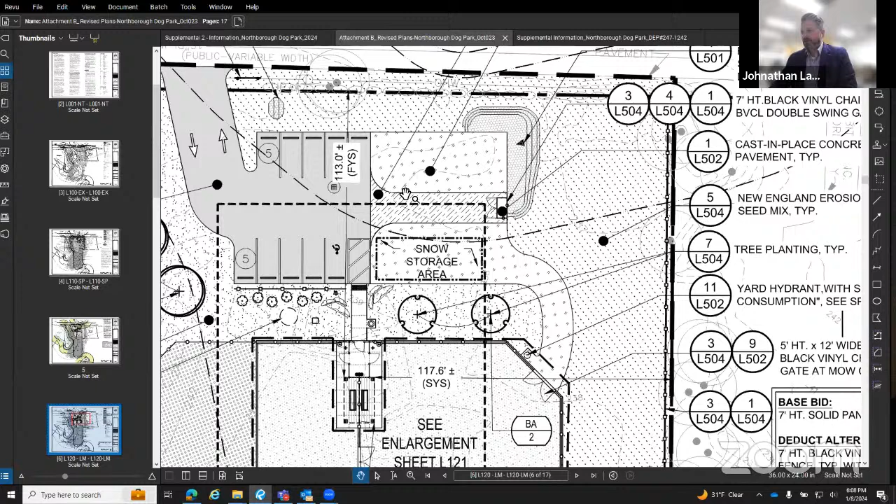Another change made since you last saw this design was the overflow parking area. If you recall, it was originally going to be all asphalt millings. Now there's just this central section that's asphalt millings to access this small dumpster area, and the rest will be 3/4-inch crushed stone paving. The snow storage area is now located here.

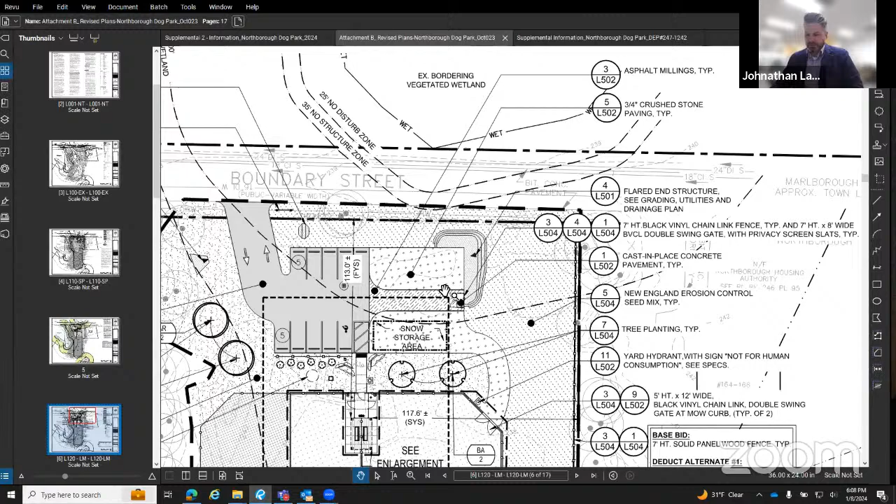We submitted the documents, and on January 2nd got 12 comments from Vinnie, which we've corresponded back and forth with him and addressed all those comments. Those are the major changes since you last saw this. I believe some of the grading was revised slightly to accommodate these new surfaces in the overflow parking area, but they all meet current code requirements.

With that, I'll open it to any questions. Okay, good, thanks Johnathan. Vinnie, in terms of the responses you have, where do you stand on that?

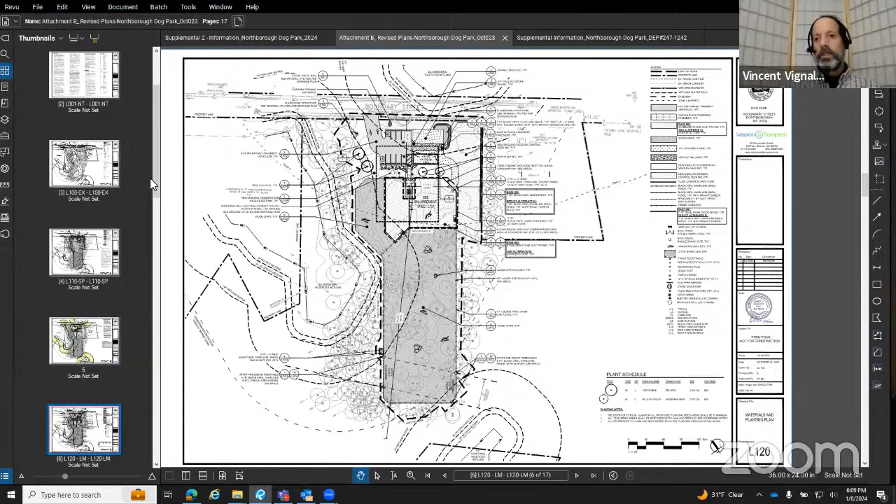Yes, I've gotten the responses, I got a response to the comments, actually I got it this morning. They were good, they responded to the issues and concerns I had raised regarding their drainage, that the system is going to work effectively, and the conditions of doing a test pit in the basin portion of the infiltration basin were responded to. That's going to be a condition of the approval.

I have a list of, I think, 7 conditions now that I included in those responses. The first was the soil deep test for the soil. Then the fill material in the compost filter tube had to be composted material. It's kind of common sense, but the detail originally just said it could have been wood chips, so if it's going to be a compost tube, it should be composted.

They don't show, and I don't know if Johnathan can show where the collector drain discharges, but we were thinking of adding a condition that it has to discharge to the infiltration basin on the east side, so it's not going directly into the wetlands on the west side. Okay, so is it actually shown on the plan, Johnathan?

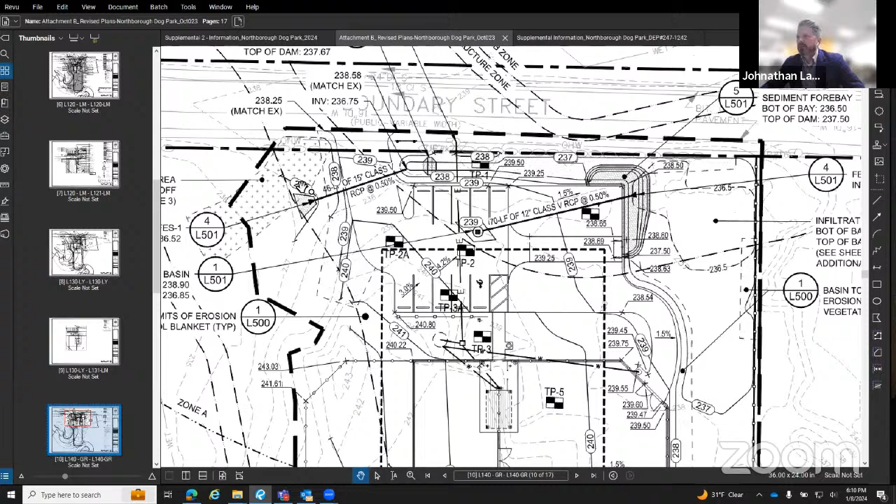Grading plan. Yeah, it was the alternate for the collector drain. I'll have to check that back with our civil engineer to see if he incorporated that. Okay. But that's a condition we can add in.

And then the long-term pollution prevention plan, they just submitted it this morning, and I need to review it to make sure it's approvable, but I just have a condition that it will get approved, or needs approval, before they get permission to start construction.

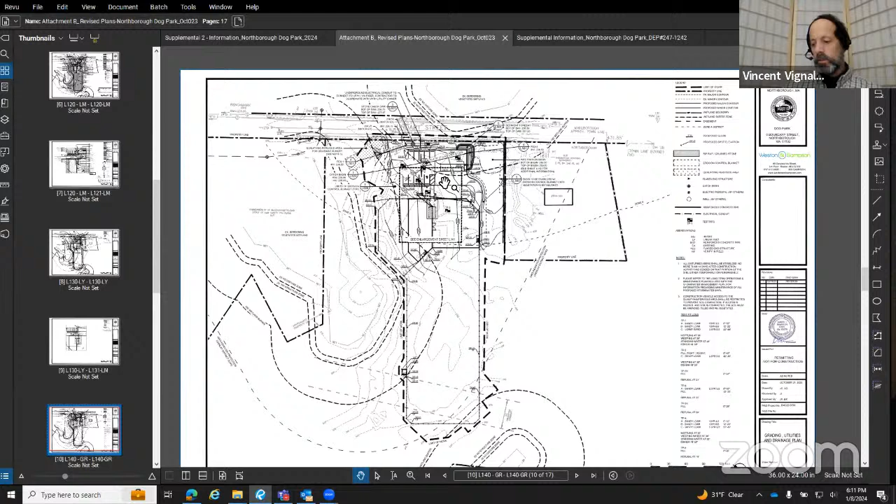Okay, yeah, and then there was a comment from DEP about a discharge within zone A for the reservoir across the street. And Weston and Sampson said they will revise or address that and resolve it with DEP. I was going to put that as a condition of approval that needs to be done prior to beginning construction. Okay, and then actually the last one just came up.

The response that they submitted was submitted by a wetland scientist. She seems like she's doing a good job, but there were comments and responses in regard to flood elevations, drainage calculations, different treatment processes that you need. I was looking to protect the town to have a PE stamp or some other certified person certifying that document. Johnathan sent me an email saying he would have the PE take care of that. So I think all those calculations and drainage calculations were performed by a registered PE, so we can have them sign that letter.

So those were the conditions or issues around the comments that I had outstanding. Vinny, are any of these conditions of concern for you, or could we move forward and just have them signed off before construction begins? You'd have to sign off on those conditions, but we can start moving. It's up to the commission if they have other issues or concerns, but based on what I've seen, I think it's in a state where we can close the hearing and issue an order with those conditions.

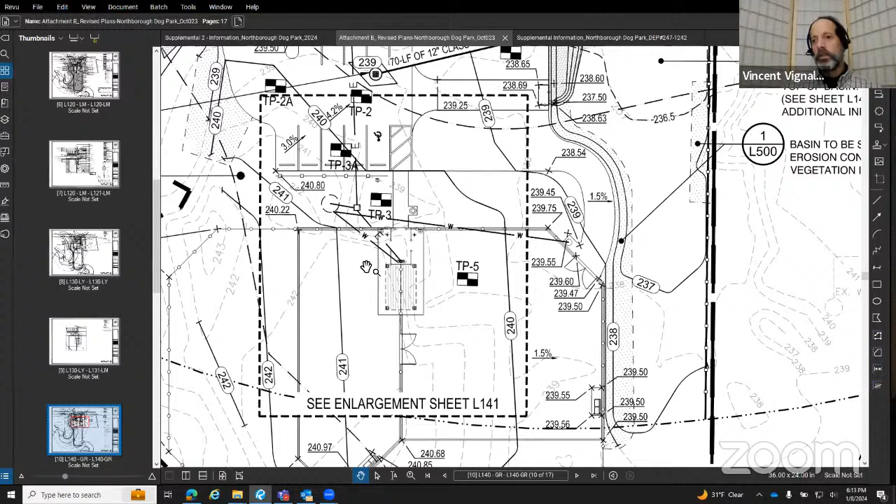There's an alternate proposal for synthetic turf in the play area for the dogs, and within that there's a collector drain that collects that. It's going to have a lot of pee, we assume, because of the dogs, so I didn't want that going straight into the wetland. I thought it should go into the infiltration basin. The grading generally goes toward the east, that's how they designed this, because the wetlands are off to the west. So it's the best layout really for the site, I think. That's correct.

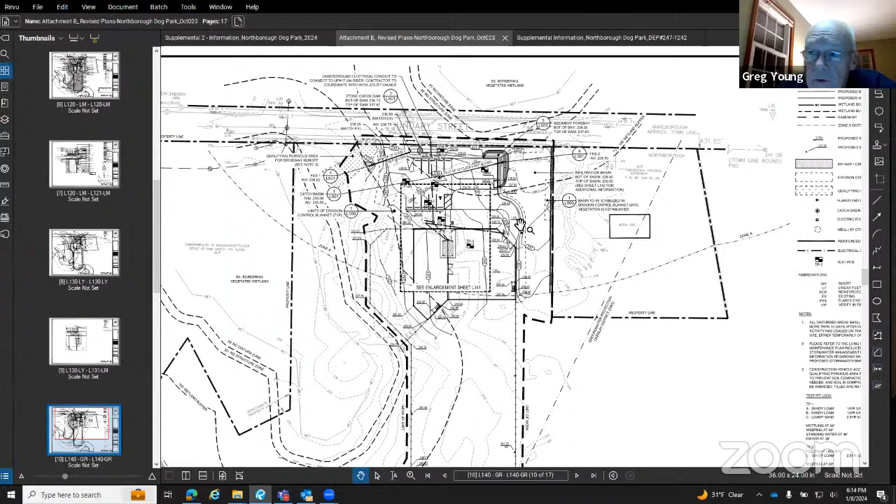Any more questions? No. Let me see if any of the general public or attendees have questions. I don't see any hands up.

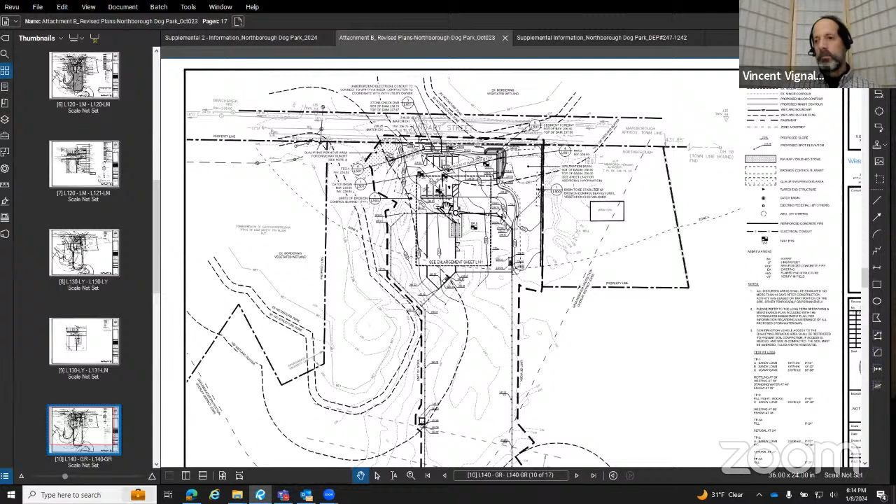So Vinny, it sounds like we can move ahead with closing the hearing and issuing an order with 6 or 7 conditions listed here. Yeah, we have our standard 29 or 30 conditions, and then we would add these 7. Okay, very good. Then we need a motion to close the hearing.

So moved. Second by Diane. Roll call: Dan Clark, yes. Justin Dufresne, yes. Diane Goldner, yes. Todd Helwig, yes. And I vote yes. Now we need an order of conditions.

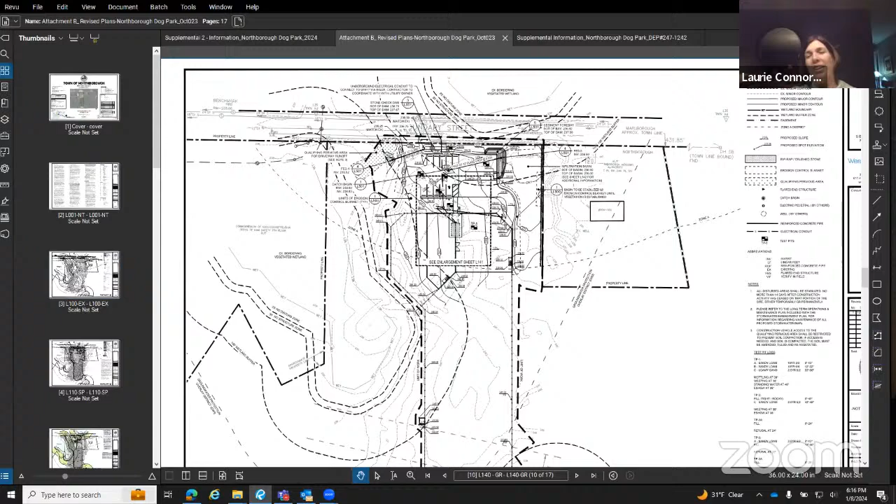Thank you very much for your support. All right, very good. Thanks, Laurie. Looking forward to seeing you at the dog park in a year from now. Okay, fair enough. Thank you, everybody. Thanks, Jonathan. Bye, good night. All right. You're a welcome addition to town.

Let's see, we have continuations here. We have a stormwater management item for 311 Crawford Street. Yes, they submitted a request for a continuation to the next meeting. They're pulling paperwork together and are away on vacation, I think, is the current status.

Away on vacation. Okay, do we think we'll actually see something next month? I think so, because we're getting things ready for the construction season, so I think they need to have something ready so they can get a price for whatever they're going to build.

All right, I guess we give it another month here. We did open this in May, but hopefully we'll get it done before then. At least we'll get something in front of us before May. Oh, I hope so. I'm hoping to see something in the next month.

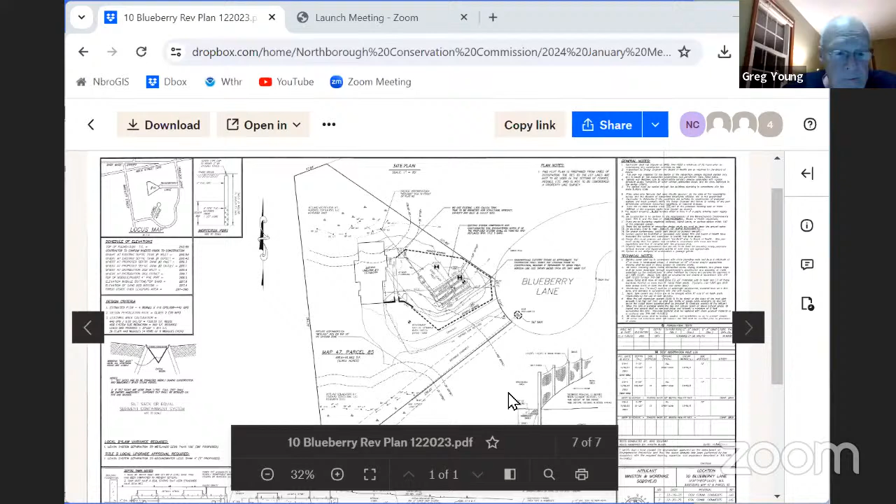Do not see Vito. Okay, let me see if I can pull up the plan. 10 Blueberry. Come on. Sorry about that. No worries. All right, let me see if I can share the screen. I see something, yep, I gotta zoom into it but I'm not sure which zoom I'm looking for here. Here it is, I think so. That's the one. Yeah, oh why isn't it dragging across? I guess I have to use this. Yeah, these computers are new to me.

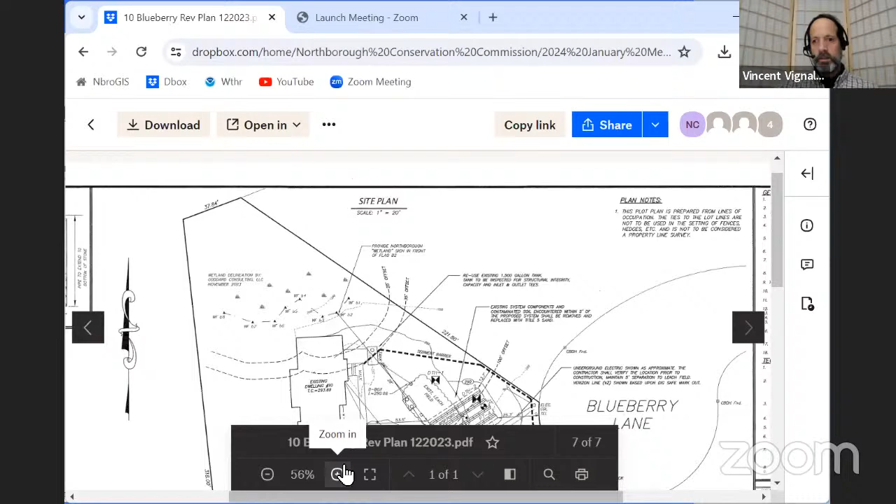Okay, Blueberry Lane, this is a repair, septic system repair. Blueberry Lane here is off of Hemlock, and north is straight up the plan. They have an existing house, and the existing septic system is right in the middle of the front yard, and it failed. They have wetlands to the north and wetlands to the south, and a big pool in the backyard. I think the commission, Greg said, did some investigation or looked at this property for the pool in the past.

So what they're proposing to do is replace the failed system here with a new system, no increase in size. They are 82 feet away from the wetland to the north, and over 100 feet from the south - this is the 100-foot buffer line from the south, so they're about 104 from the south. So they're kind of splitting the distance as best they can and fitting it in this corner of the lot. Driveway comes in here around to the house. So it looks like it's the best they can do for a tight site, and it's a repair, so that should be an improvement.

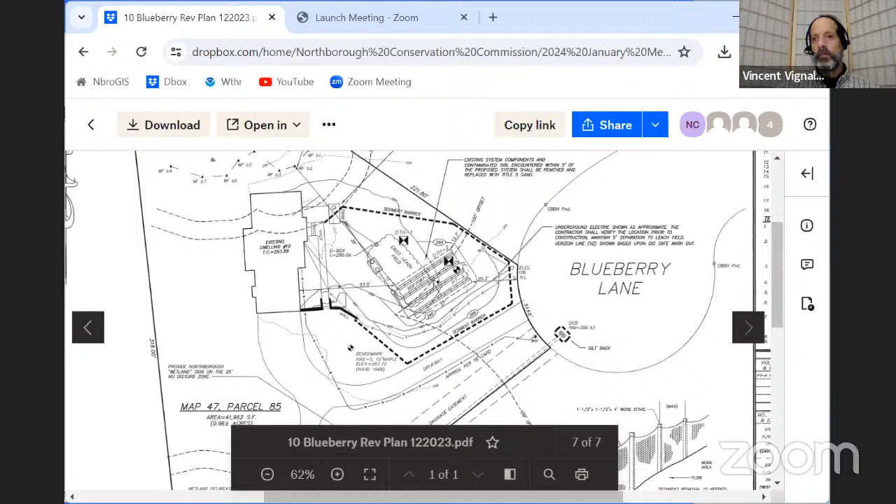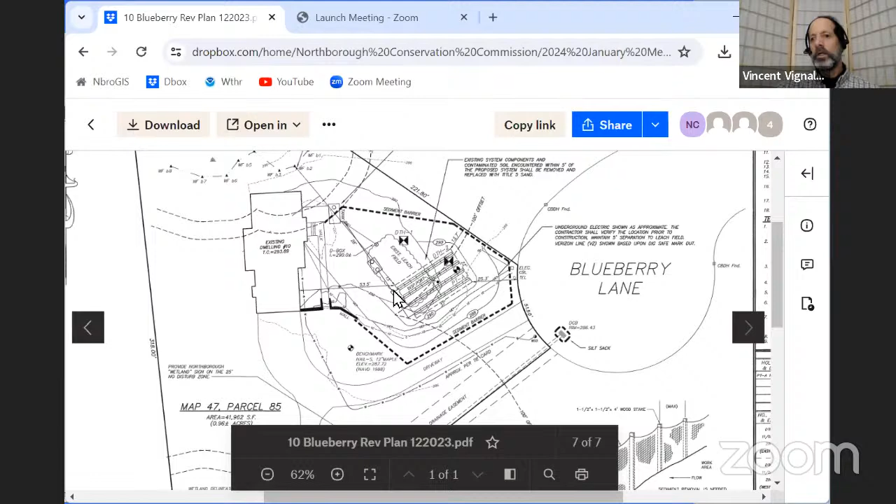It's pretty much the same footprint, right? Yeah, pretty much, same area of system. This is a different kind of system - I think it's one of the modular Eljen modules, so it should work a little more efficiently. And they're going to have to monitor the septic tank. Actually, I think there's a pump in this one. No, so it's Eljen units, and it's just a regular septic tank to a D box.

Okay, the only issue I found with this site was that there's a little access road that comes out here, and there was yard waste, branches and things down in the south, right in the 25-foot no-disturb zone, with some tires and some kind of automobile parts. I have a photo, but it might take longer to find it and get it up for you. What I'm hoping to do is get the order or get your comments, and if appropriate, we'll get an order, and we'll require as a condition that they clean up all the material that's in that 25-foot buffer zone before they can start construction on their septic system.

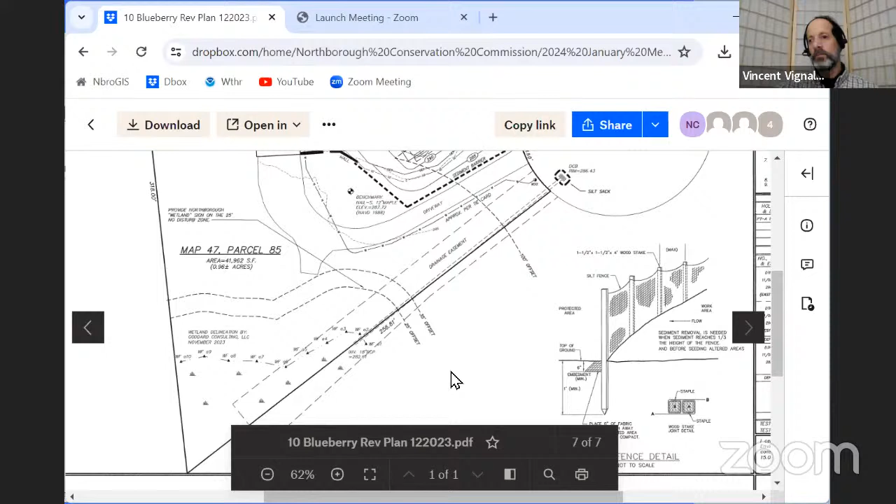All right, it seems reasonable. Any questions from the commission? Comments or concerns? Looks good to me. Yeah, okay, as I say, it looks clear. I will check, I don't see any hands up in the audience.

Okay, then we need to close the hearing on 10 Blueberry Lane. I move that we close this hearing. Second. Second, was that Dan? Nope, Todd. Roll call vote: Dan Clark, yes. Justin Dufresne, yes. Diane Goldner, yes. Todd Helwig, yes. And I vote yes.

All right, now we need an approval to issue order of conditions for 10 Blueberry Lane with the usual conditions, Vinny, plus the one you mentioned about cleaning up the waste area by the southern wetlands, I guess that is. Yes, that'll be before they can start construction of the septic system. Okay, need a motion for that.

I move that we issue an order of conditions as usual, plus the one that indicates they will clean up the mess - mess isn't exactly the best word, the trash, debris, yes - the debris, before they get a chance to get a new septic system. Good, is there a second? Second. Roll call: Dan Clark, yes. Justin Dufresne, yes. Diane Goldner, yes. Todd Helwig, yes. I vote yes.

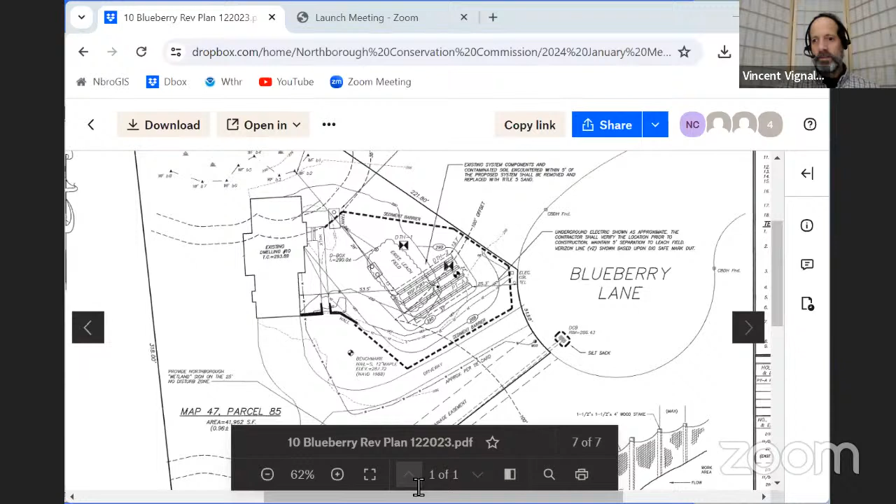We'll hold off till you take that down, Vinny. I know you're working on it, diligently. I'm sorry, whoops. Trying to, how do I get there? Too many screens going. Stop, here it goes, perfect. All right.

The next one we have is 14 Mohawk Drive. That is an RDA for a failed septic system.

I don't see any hands up. I was afraid you were going to say that. That was Vito as well. 14 Mohawk. And I will bring up the plan.

This one, Vinny, doesn't look like we have a DEP number on this one yet, huh? Unless we've gotten it, we don't need one. This was a request for determination, just an RDA. It's only okay, right? The next one doesn't have a DEP number though.

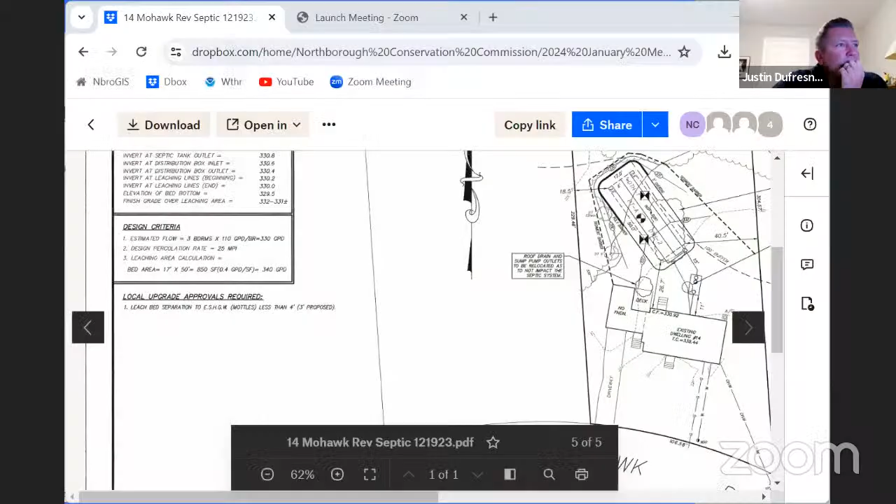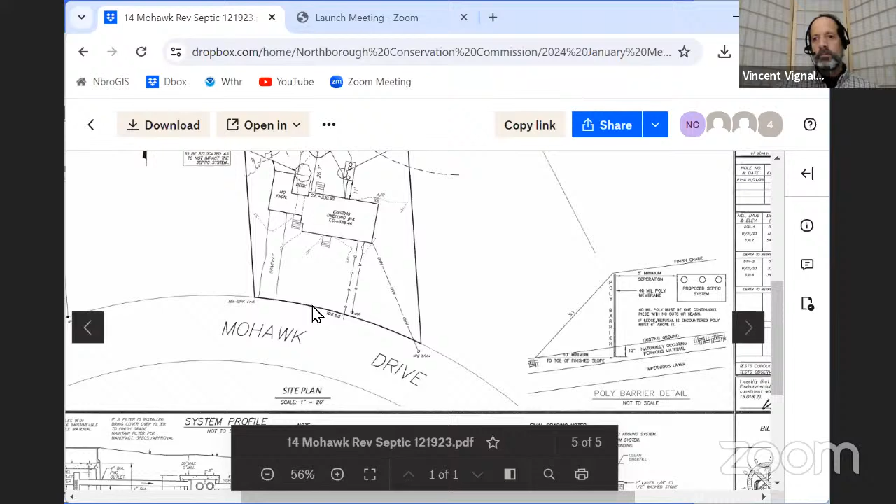Okay, oop, too far. Okay, let me zoom out a little so you get the idea. So this one, we have wetlands in the rear, and we have Mohawk Drive in the front. Mohawk is off of Washburn, off Whitney.

The location is basically the same issue as the last project. There's an existing septic system in this location. It failed, so they're proposing to put this new one a little bit larger, tweaked counterclockwise. And the wetland location is up in this area, to the north. Where my 100-foot buffer zone lines are here, runs here and then down, I think - oh no, down here. So the system is located about 102 feet away from the nearest wetlands.

So what they have is they're trying to repair it. No increase in size in the structure, it's just a simple repair. They are proposing to put in 2 signs because there's a little bit of activity. There's an old collapsing shed out back, but this is a 25-foot no disturb. So I asked for a sign in this area, and that's what the note says, to put a sign here for wetlands no disturb, and then one over here, wetlands no disturb. So that people are aware, we assume that it's being sold, so people that buy it are aware that they can't expand into those areas.

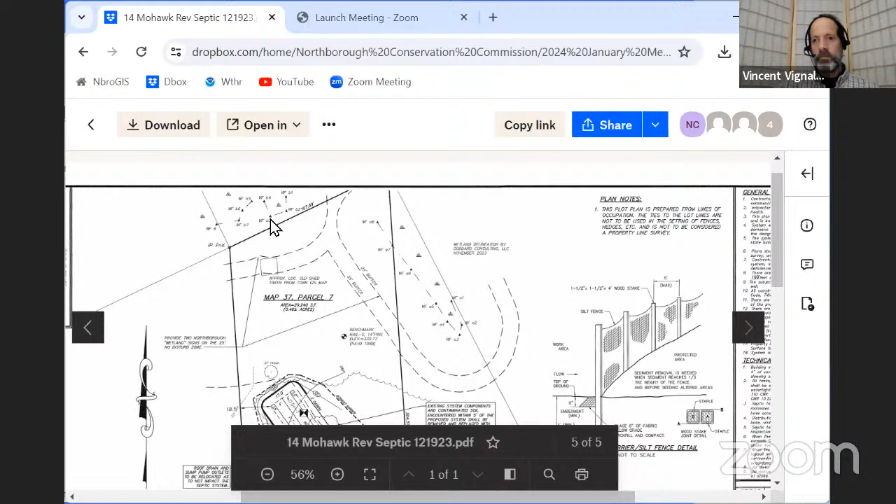You said it's 102 feet? Yes, that's not even the 100-foot buffer zone from this wetland. This is 25, 35, and then 100. Yeah, they just barely encroach a little bit inside the 100. They're doing, yes, they got some grading inside the 100. Okay.

That's why it's an RDA. So nothing special, Vinny, other than the usual? No, I think this one, they already added in. I made comments and Vito same day changed it up and added the signs, and I think we're ready to go. Okay, any questions or comments, concerns from the commission?

I have a question. Is this lot particularly just flat? There's no grading or anything required?

Correct, there's limited grading. You can kind of see this solid line here. I can zoom in a little, but this will, oh, so this line here shows the grading that goes out. This is the existing contour coming like this, and then another contour that comes right there. So they're filling maybe a foot and then filling down here about 3 feet, but it drops right off.

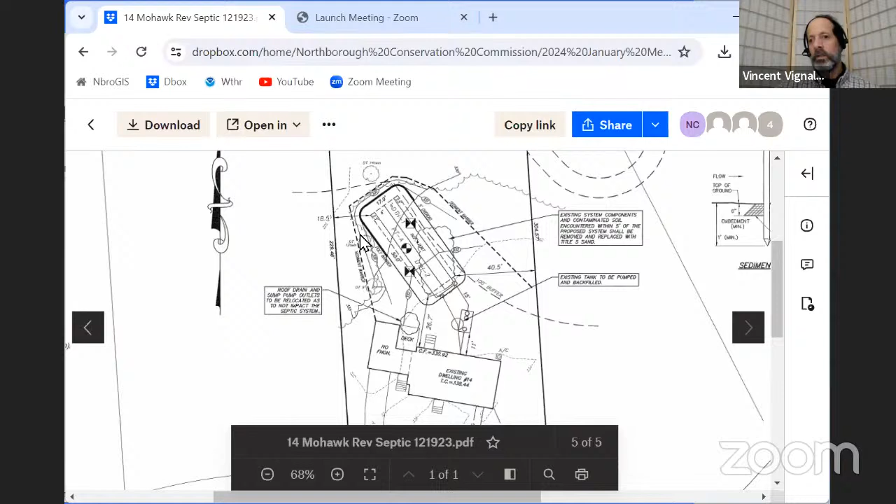They have an impermeable liner to keep the grading limited. They're actually trying to protect this tree, so it keeps the impacts away from our wetlands that are in the back here too. So it's very limited grading, it's not like it's a big fill system.

Thank you, good question, thank you. Anything else? No. Nope. So Vinny, I think we're looking at a negative determination here with just boilerplate, right?

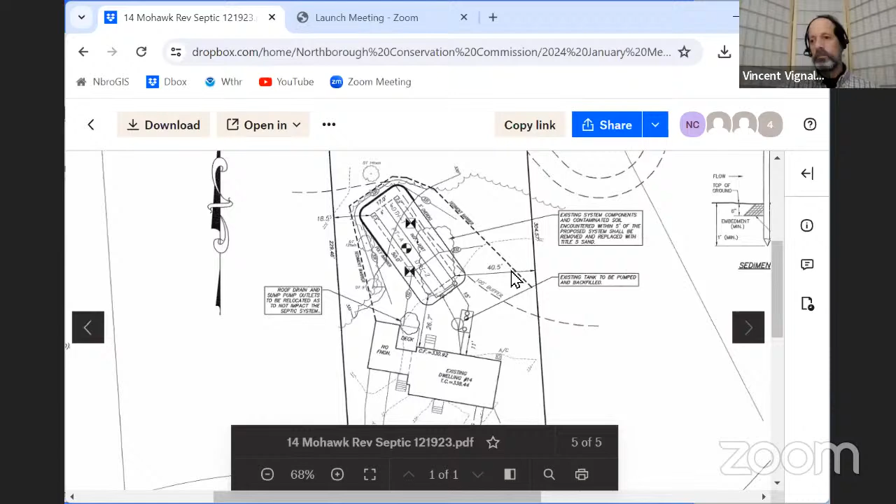The standard conditions, yeah. Well, actually, we don't have standard boiler conditions, but just a condition that they notify the commission 48 hours before they do the sediment control, and I'll inspect it, and a couple of signs will be a little different. Well, they're on the plan, so we'll just have them follow the plan.

Okay, so I think we need to close the hearing to start this. Need a motion to do that. So moved. Okay, is there a second? Second. Roll call. Dan Clark, yes. Justin Dufresne, yes. Diane Goldner, yes. Todd Helwig, yes. And I vote yes.

So now we're looking to issue a negative determination for 14 Mohawk Drive with nothing added special of any, right? Nothing special, correct.

So moved. Is there a second? Second, seconded by Dan. Roll call. Dan Clark, yes. Justin Dufresne, yes. Diane Goldner, yes. Todd Helwig, yes. I vote yes. Okay.

We are now looking at 6 Hillside Road. This one I know I'm going to get help on. I think Zoe's here. Zoe's here. I see Zoe Krouner. I'll bring Zoe in.

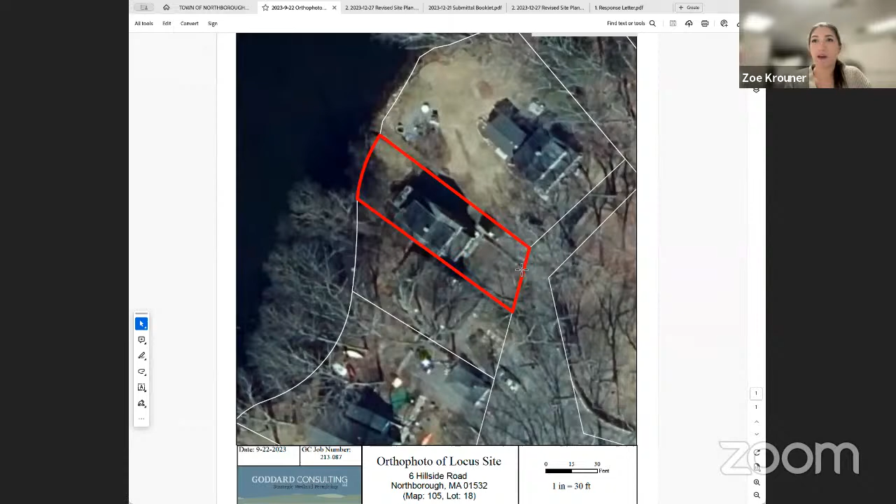Some of you have been there. Small lot, coming down Hillside Road. The driveway looks like it's partially off-site. It comes up, stops around here, and then we've got lawn that goes around the side and the back, and then we have the bank of Smith Pond over here. There's a little small retaining wall with lawn and a walkway that leads up to the back of the house.

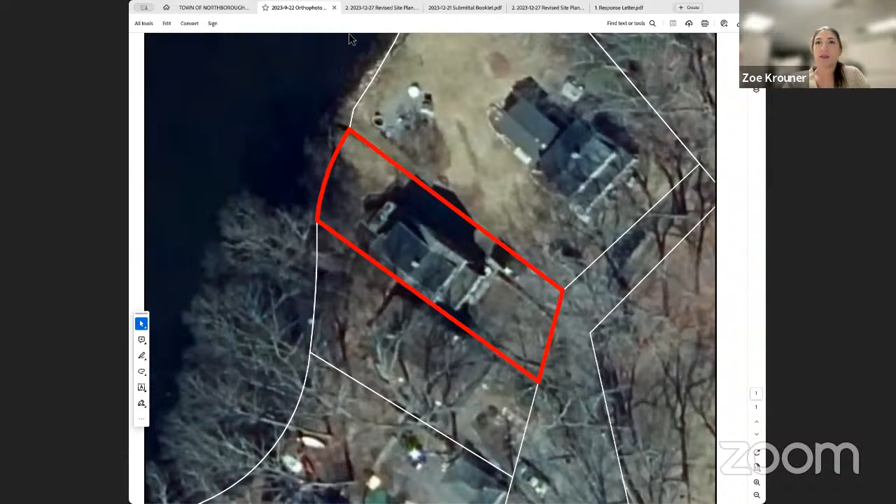So this is the site plan that we submitted. Coming down Hillside, still can't see my pointer, right? Yep, I can see it, it's small but it's moving. Okay perfect. So there's a lot of lines here because they're using this plan for the Board of Health septic application as well. On Hillside Road, there's a driveway, actually I highlighted it over here. In purple is where the driveway is.

I'm just going over the existing conditions really quick. The last thing I was bringing up is the deck in the back, and there's a patio piece underneath the deck. It doesn't meet the whole length of the deck, it comes out about 6 feet, an old concrete patio. The site is within the 25-foot no-disturb and 35-foot no-build zone, and the whole site is within the 100-foot buffer. The applicant is looking to renovate some parts of the house within the existing footprint, renovate the back deck, and that patio area underneath the deck.

The applicant understands that he's within the 25-foot no-disturb and 35-foot no-build zone, so he understands the importance of renovating just that existing patio piece underneath and not extending past that to respect those buffer zones. They are going to replace the septic system, currently on the right side of the lot, and try putting it farther away from the wetlands, closer to the front of the lot, and redo the driveway. The proposed driveway is this orange line.

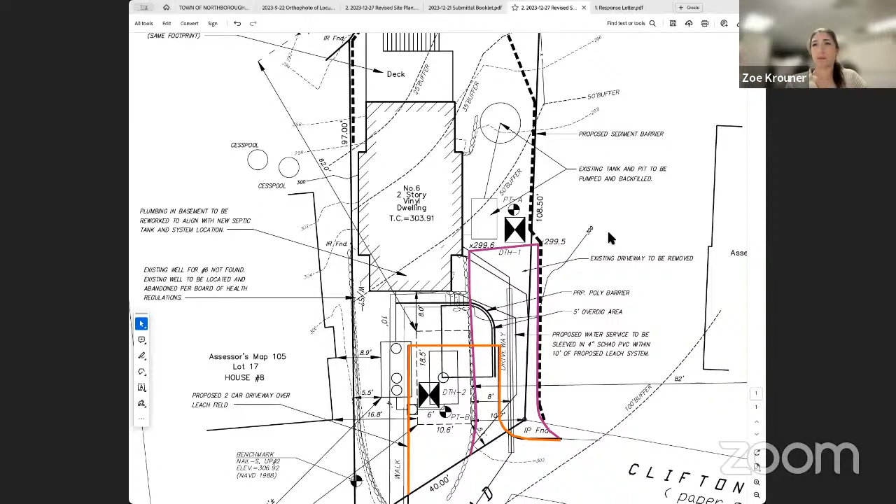And the last thing -- we submitted this plan and received some comments from Vincent, which I'm happy to go over at any time. We did submit a revised plan addressing some of those things. Additionally, the applicant had originally proposed an overhang extending out of the front of the house, but he's no longer proposing that -- that was one main change to the site plan. And of course we have the erosion control proposed along the side and around the back. I think that completes my overview, and I'm happy to answer any questions.

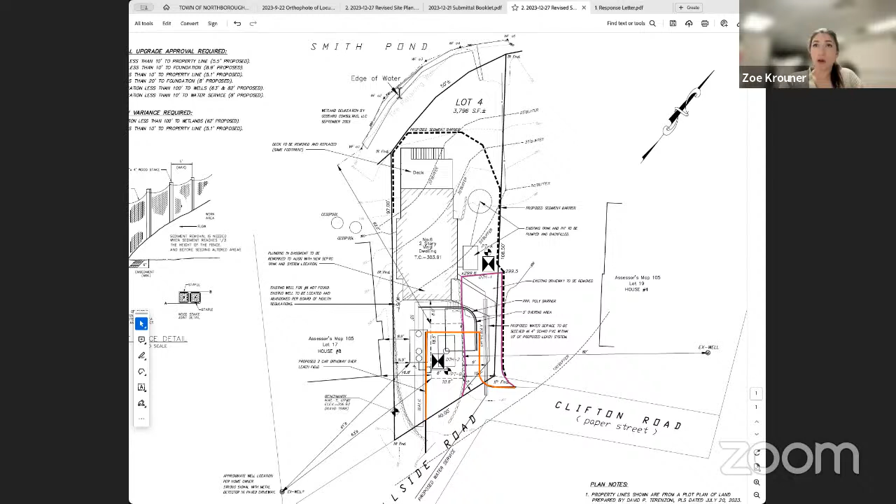One question I have, Zoe -- it's a tough location, number one. For sure. What's going to happen between the edge of the water and the deck? Between the edge of the water and the deck, really nothing except for the erosion control. Okay, so you leave it as it is. Leaving it as it is. There's some maintained lawn -- the limit of lawn isn't shown on here, which isn't super helpful.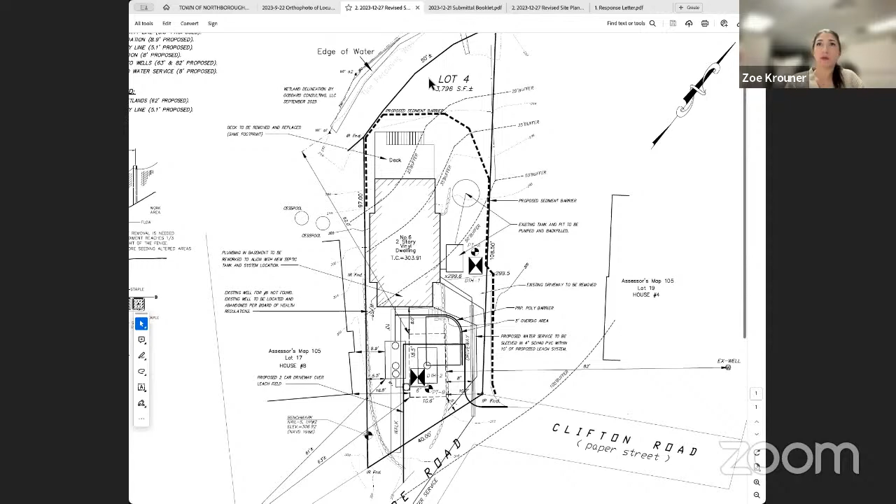So nothing in front then, nothing in that area in front of the house, between the house and the water? Between the house and the water, no. Actually, if I could share my screen, I've got a couple of photos. All right, does that mean I have to stop? Just go up to the top and stop sharing. You'll come back on, so don't move away from it. Okay.

My question, and I think the concern that Greg raised, is I assume the new homeowner is going to go in there and do something with that. I may have another photo of it, but no, that's just the plan. So the concern is what is going to be happening in here, and I think we will probably have a condition in the approval that no alteration within the 25-foot occur. So I wasn't sure. I'm open to suggestions from you on how we can make that happen so that we don't have future violations on the site.

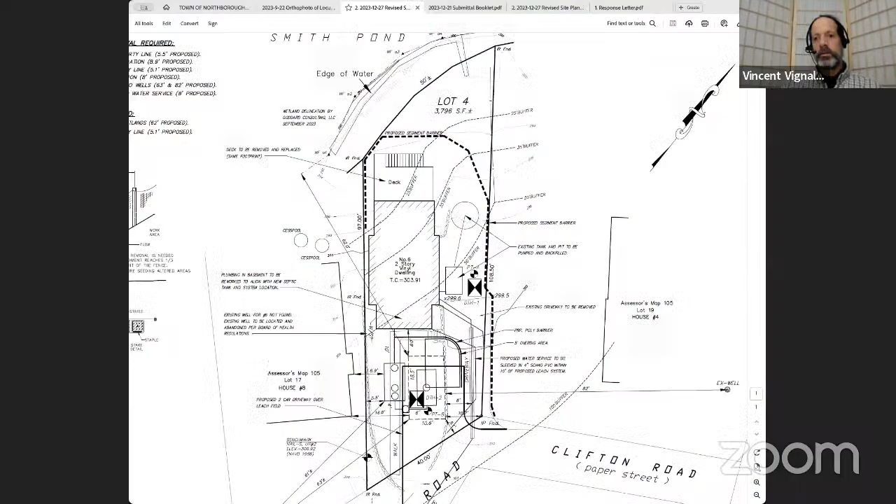One question I have here, I guess it's to Vinny and to Zoe, is that you can put that picture back up of the front of the house. My picture or Zoe's? Picture, either one, either the picture or the plan, it doesn't really make a difference, just so I can point, as long as the front is shown. Do you have down that, toward the water? Good. Yeah. So this whole area that we have here, up about lot 4, this whole area is tires.

The embankment is, yes. There's rubber tires all stashed in there, 2 or 3 high. Actually comes in a little bit too on the side there. Are we gonna just plan to leave it as is, Vinny, or not disturb it, or what? Well, that's part of the question. That is the existing condition - they built the retaining wall with tires and filled behind it. And they're not proposing to do anything with that.

Okay. It's now covered over with a lot of bittersweet, so I would be fine with removing bittersweet, but I don't know what else is being proposed. It looks like it's not their property. If I'm looking at the property line correctly, the property line is inside of the tire line, so they don't have the right to go out into that area. So that's what I'm trying to figure out and get the proponents to propose something or commit to not doing something.

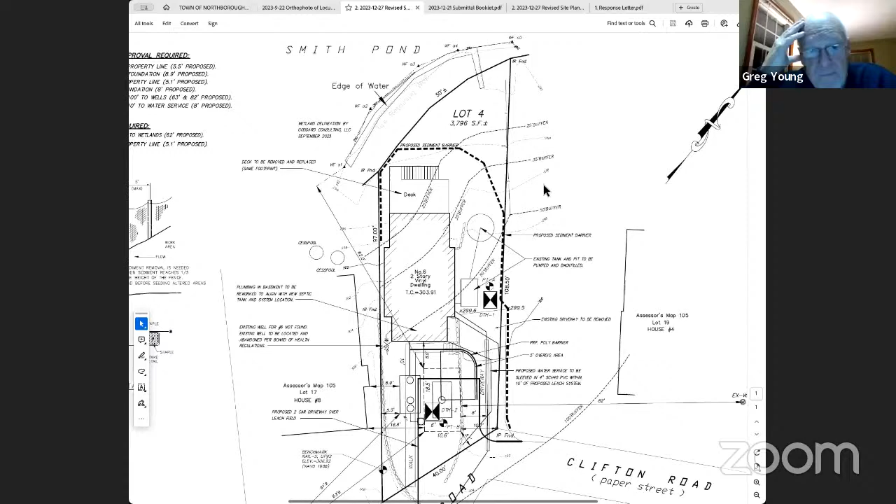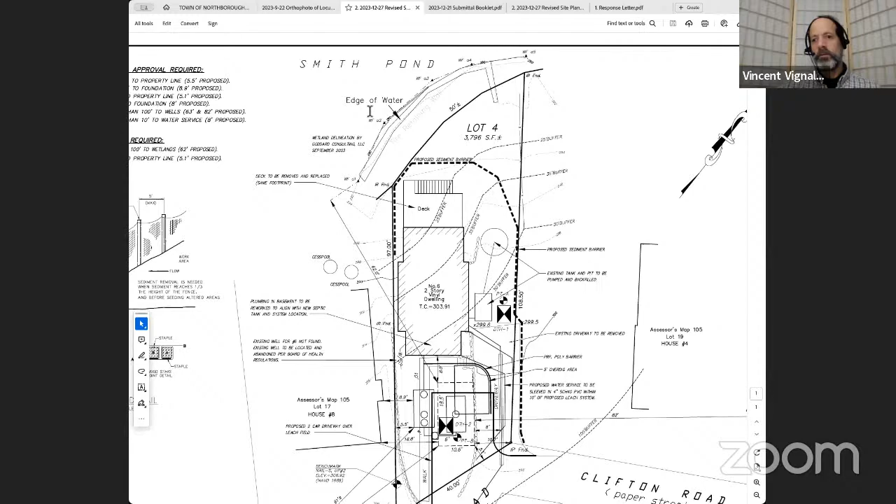Okay. Who owns that? Who owns the tires, the retaining wall? I'm assuming that they were installed and constructed by the prior owners, and I think the prior owners thought that they owned right up to the pond edge. But is there an abutter listed? Can you zoom in to see if there's an abutter listed on Vito's plan? But that's Smith Pond.

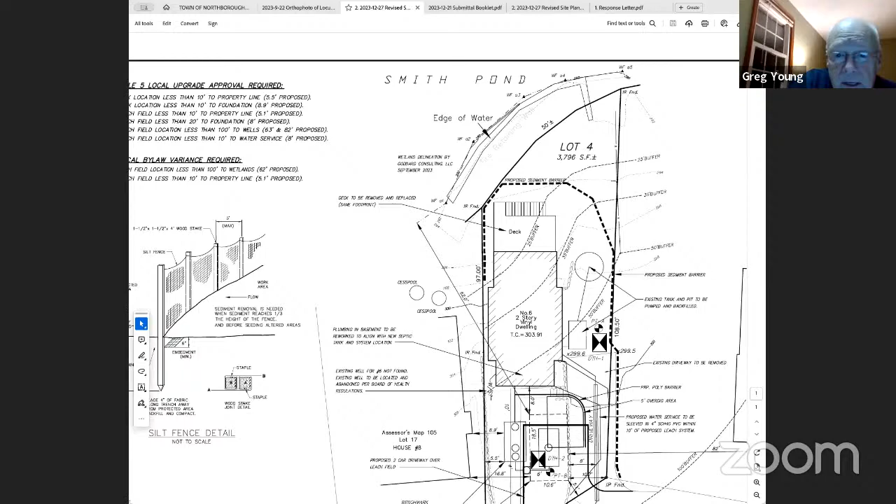It doesn't look like it's there. Yeah. No. Because when I walk down pretty much, if you go down the property line heading toward lot 4, the tires actually come up around the side there too. Yeah, there's kind of like a ramp in the northeast corner, and that's a ramp down, and the tires form a retaining wall on the left side as well as along the bank side. So as you're driving down the ramp, it's on your left.

So I don't know if we want to do anything with those, or if remediation would cause more harm than leaving them alone. But that's one of the things we're looking for some guidance on. Well, we don't have a DEP number on this right now, so I think we have time. Zoe hopefully has time to get a response and come up with some idea or plan of what they would like to do and what they can ask permission to do, I guess.

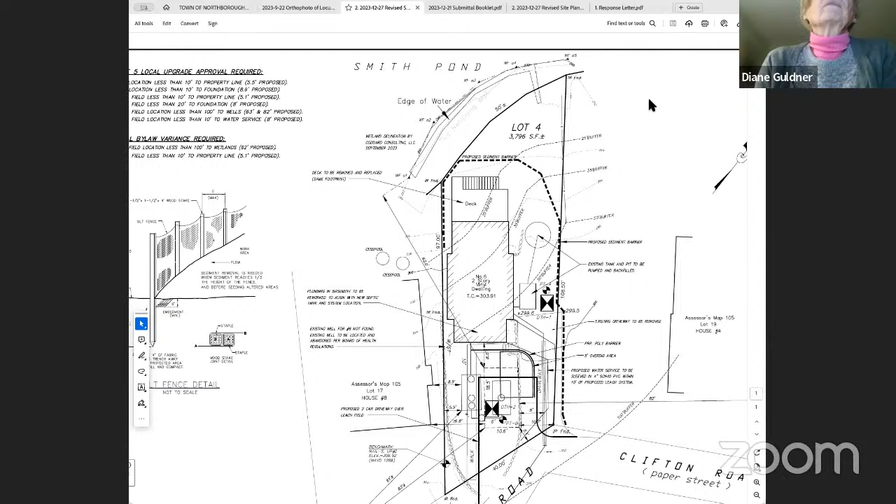So I'm not sure if, like Greg's point, the basis is will removing them be more detrimental than leaving them. And we need some research into that.

Yeah, because I think there could be a lot that goes into that, Vinny, with potential silt. Obviously a lot of silt issues could happen. So you're looking at some type of something that you have to put out in the pond so that silt doesn't get everywhere. You have to get equipment basically down and in there, and those tires could go deep into the ground too, so I don't know the depth of them and kind of the stability of all that stuff.

So I guess it's just something maybe for the applicant to take a look at, come back to us at the next meeting with some thoughts on it, overall is it still stable, and if they were to take them out, what does it involve. Could be more expensive overall than this whole project is to get those things out of there. So I think it's different than, I know Todd mentioned kind of the pile of debris. I think this might be a little bit different than that, but I think we need the applicant to tell us where they are, because this would be the time to do it, right?

You're going to have a bunch of equipment out there doing work. So while you have access to the back there, now would be the time to do it. But I just think we would need some direction on the stability and whether or not it makes sense to do it, or if it's better to just leave it in place at this point.

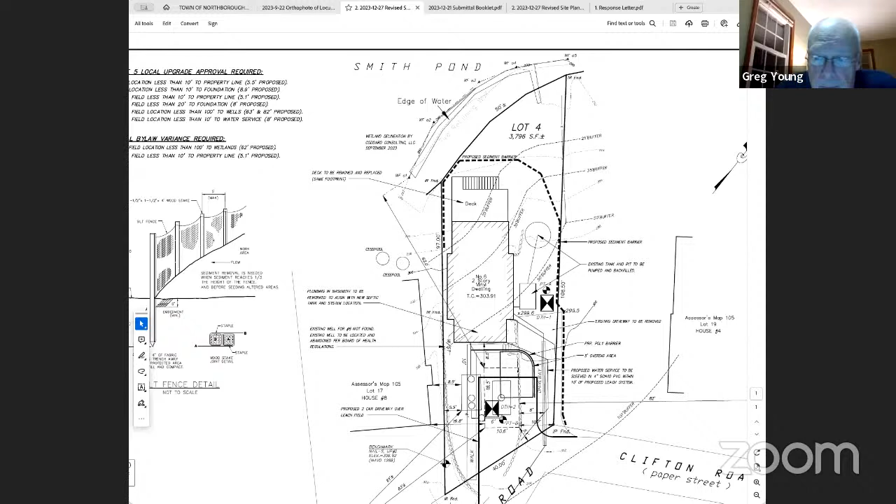Scott, are you with us? Yeah, hi Greg, thanks for letting me join. No questions or anything, I was just watching the meeting. Oh, you had your hand up, so. Oh, did it do a hand up? My apologies, didn't mean, it must have been a slip. My apologies. Okay, no worries.

So Zoe, I think we're all set, right? We have no DEP number, so we can't close anyway.

We got a couple questions here. And just a final follow-up, the other question that they didn't address was the idea of the septic system separation of groundwater. So I checked with the Board of Health, and they haven't seen the plan yet. If the Board of Health approves it, then it's going to be approved, and then we just review it based on that. So I let the Board of Health folks know, Mike Seeger, know the question, and he's going to let me know what they've decided when the submittal comes in.

Good, okay. Anything else from the commission? Any more questions, comments we have here?

Okay, then we need a motion to continue 6 Hillside Road. So moved. Second by Diane. Roll call. Dan Clark, yes. Justin Dufresne, yes. Diane Guldner, yes. Todd Helwig, yes. I vote yes. Continued till February.

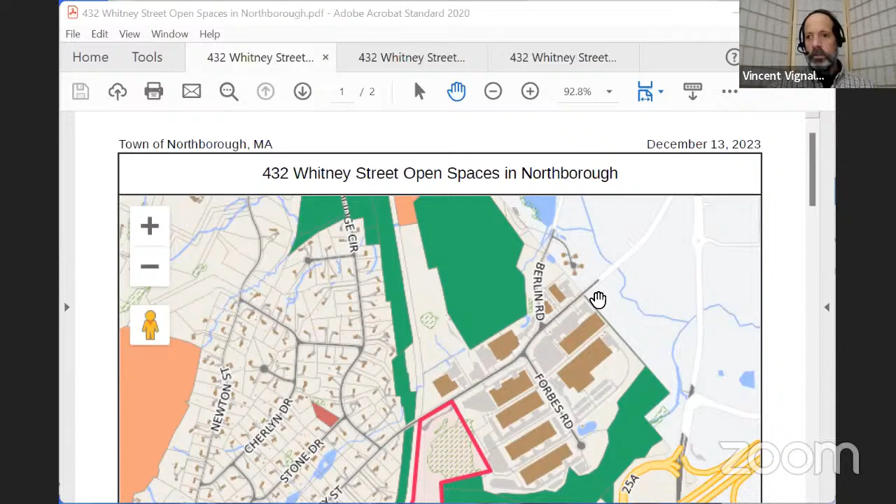Sure, do you want to see a plan? That's probably best to do the open space. All right, let me... come on... All right, go. So this was a sketch that I pulled together showing what that does.

Whitney Street going bottom left to upper right. The town boundary is right here with Berlin. In red is 432 Whitney Street. The property is just to the east of the CSX Railroad, which is just to the east of the Wachusett Aqueduct.

So currently, there is no access between this open space, which is owned by the DCR flood control folks. Actually, the one area down here, I think, is ponds and lakes, and then flood control in this area for the Barefoot Brook flood control. So currently, we have a trail going down the Wachusett Aqueduct Trail and no way to go across the railroad tracks to get into this property.

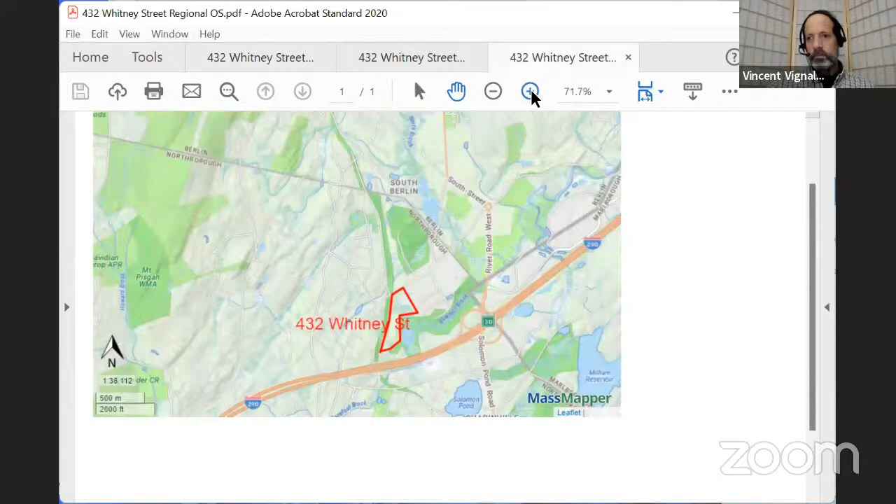What this property in question will provide is we go across from Aqueduct across Whitney Street and then down through this property, and then we could gain access for a trail system to go off and tie into that. To zoom out a little, that image gives you an idea that 432 Whitney ties into that Barefoot Brook flood control area that then goes even farther downstream into Berlin, and then across 495 you could get into Hudson. So it's definitely a connection for an east-west corridor that doesn't exist right now. That's a benefit of that.

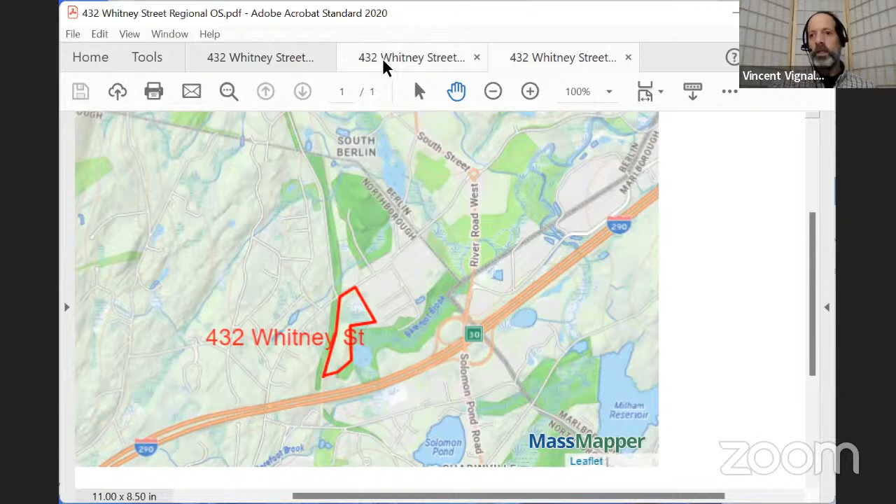I also pulled together this notice of intent to sell or convert property. This is where it comes in, under chapter 61A, and the town has the right of first refusal. So that's kind of the background. You guys are all more familiar with it than I am, so I'll let you discuss it. Okay, good.

Yeah, I've walked that property at least 6 or 8 times over the last 10 years, so I got a pretty good idea of what it is or isn't.

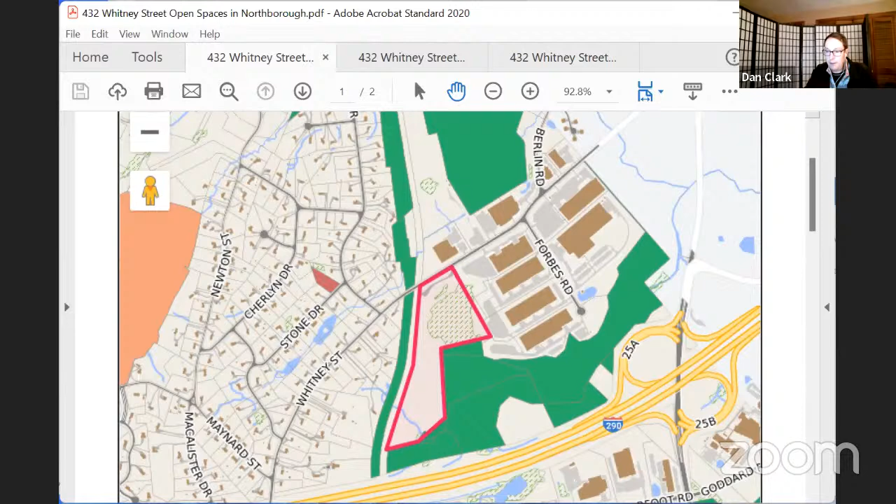Dan, open space vote on this one, right? Said yes? Yeah, I think there was unanimous consensus. This was a high priority parcel, and we all thought it'd be worthwhile for the town to exercise the right of first refusal for lots of reasons, some of which Vinnie's mentioned. It's a good open space acquisition in terms of size and connectivity to existing open space, so we were all in favor of it.

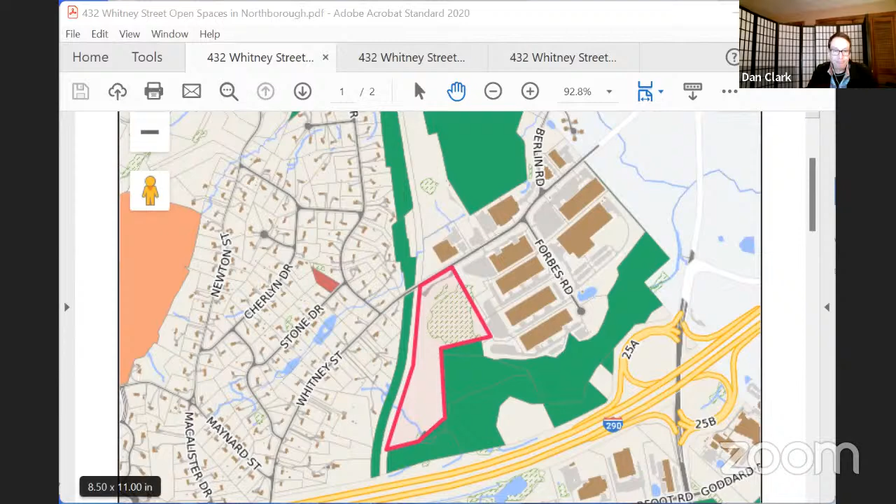Did the planning board vote on this yet? Yes, they did, and they recommended to acquire it. I think the select board's doing it tonight, right? It was up for discussion. They were hoping to get your feedback. I told them it was coming after our meeting tonight.

I hadn't gotten a response back until this afternoon from DEP on the idea of uses. The Conservation Commission has noted there's a big wetland right in this eastern portion. You can see an existing drive along the north edge, but this wetland limits the development going down to the southern portion of the site.

The area is currently zoned commercial industrial, so that development is allowed, and the buyer has, I was told, a history with a rail operation. I wasn't sure how the Wetlands Protection Act and what kind of jurisdiction there was for a rail operation. When I talked to the person at DEP today, she said rail operations consider themselves exempt, and DEP has not gotten a legal determination to force them to comply with the Wetlands Protection Act. So I believe the appropriate term here is railroaded.

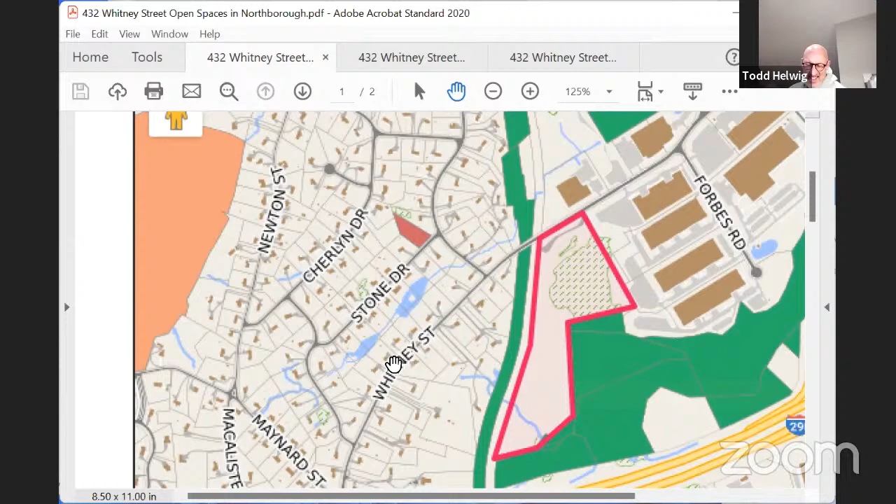This actually came up at the Community Preservation Commission meeting last week, where we vote on projects, and it looks like they're going to have about $1 million to spend. This is likely going to be the thing they spend it on, but they'll still need some money from someplace else. There was also discussion, and we don't know whether it would work yet, but it might be part open space, part affordable housing, if it could be worked out.

Yes, so I just wanted to mention, we were talking about all these open space purposes for it, but there was also discussion about having the money come from two different pots. Part of it would be for, if they can, and like you said, it's tough to get in there, but if you do, there might be some room for some affordable housing at the back.

Yes, and from prior conversations, it is something that can be done. It would definitely not go over the 5,000 square foot wetland fill limit. If they were to do some filling to get an access road in, it would be narrower, pushed up against the western property edge, but it is feasible to build a road and go up to the area at the top here. It's actually a beautiful view out to the east, overlooking the wetlands down below and the pond system down here, so it would be a good opportunity, good use for housing.

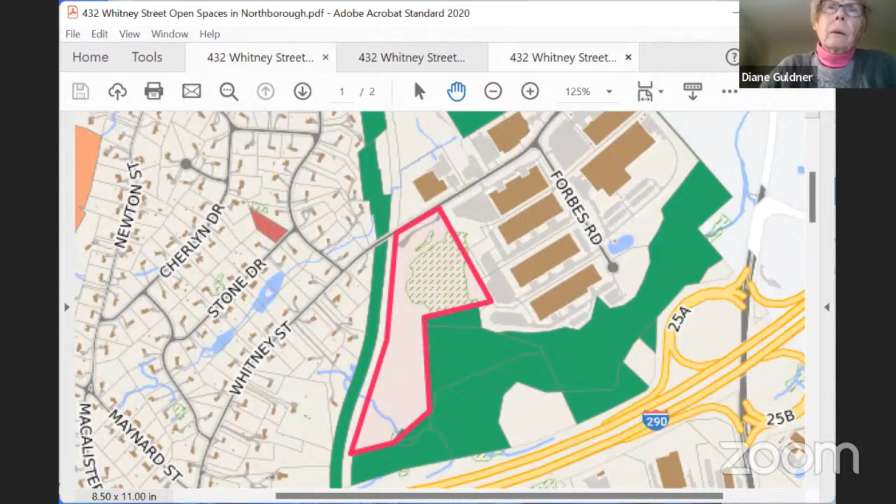Where does the stream go through in the part that's green? It flows under the aqueduct and under 290, comes through here, and then flows around and up this way, right through pretty much the middle of the green. It actually cuts the edge there.

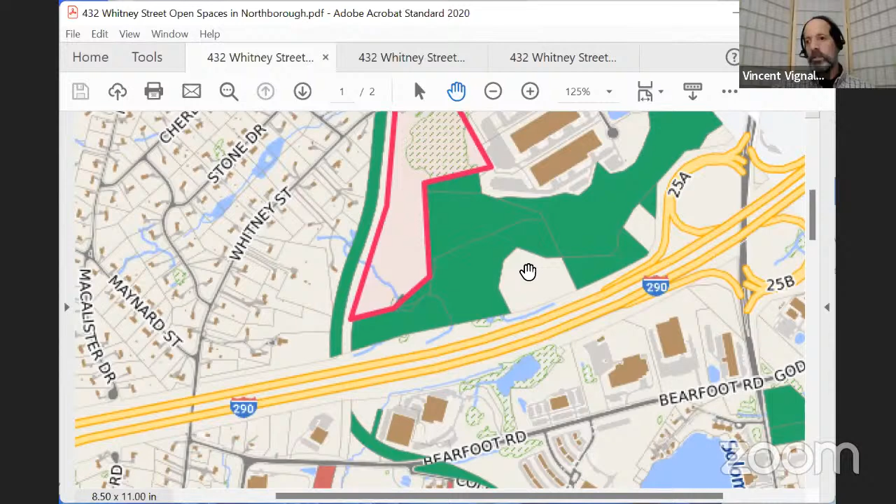And where does this green parcel stop at the other end of this map? Is that up in the parking lot up there? Well, the green continues. Yeah, but the town line is there. Town line is there. Yep.

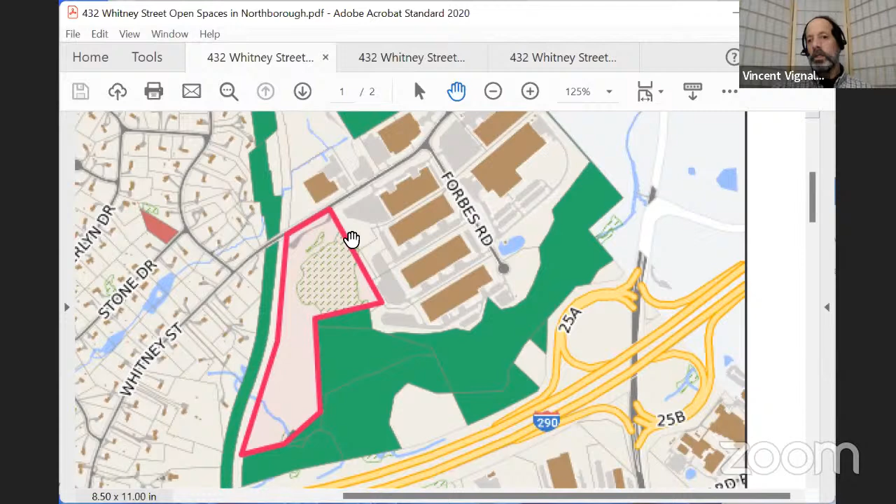That sounds good. We were talking about utilizing the existing stone dust path in that open area for a parking area, for people to go around and up to the Aqueduct Trail. Then consider building something there, with that area possibly serving as parking for a trailhead, while the road continues on to the housing development up top.

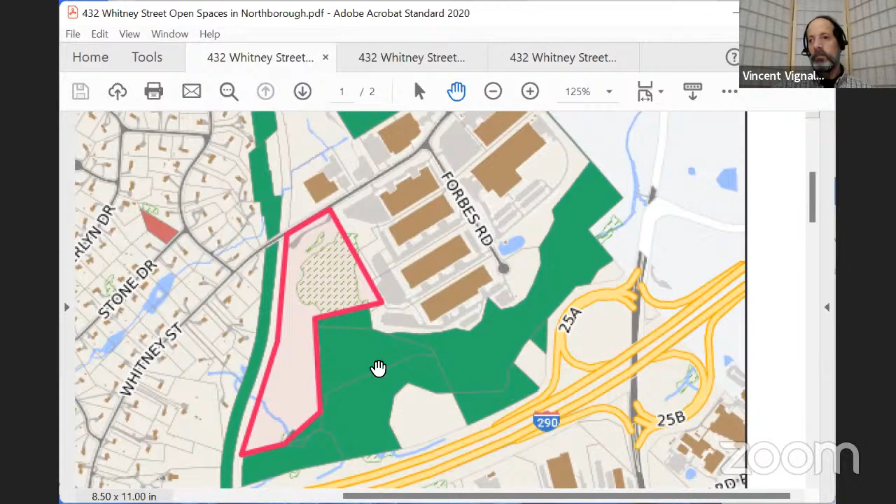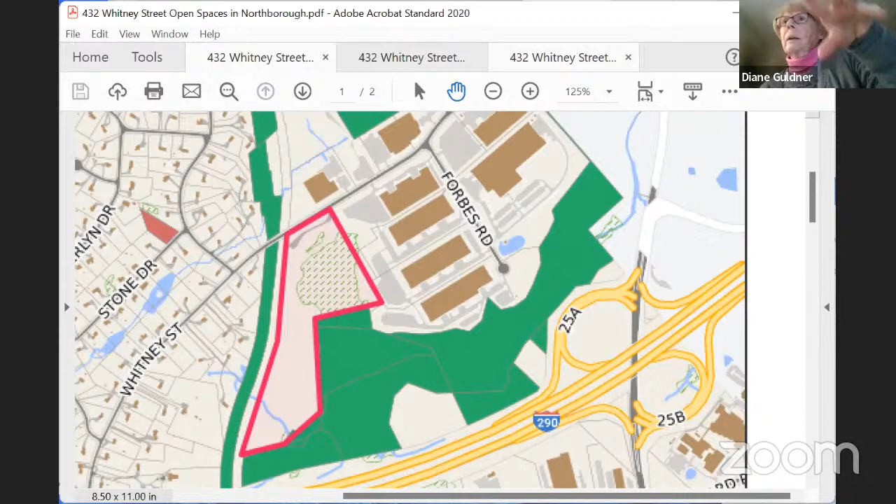That's interesting, but like Todd said, Diane, that's probably a ways away. In the meantime, go tell all the deer living down there that they can't have that for housing anymore.

So what are we looking for? We need a vote from the Conservation Commission, which can then be documented and sent. Yes, and then I'll send a memo up to the select board with the recommendation from the Conservation Commission.

My personal position is I'm kind of on the fence here, but when I think about what could happen if it's taken over by the rail company with very little interaction on our part, then this is probably the right way to go.

I take it the private person who was going to buy this has backed out. Wasn't there a private person? No, there's an accepted purchase and sale agreement, or agreed to purchase - that's what's driving this whole effort. Right, certification of the purchase and sale agreement. So they have a certified PNS, and Howland Development is the nominee or assigns, in Wilmington, Mass.

I know it's been an interesting ride for a while, hasn't it? Okay, no more questions or concerns. Then we're going to vote on accepting to move ahead with the purchase of 432 Whitney Street.

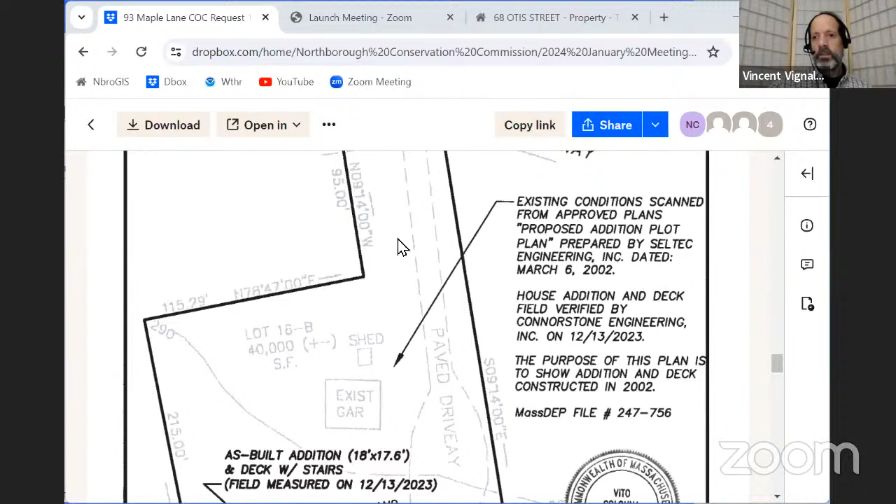It goes into a little cul-de-sac, dead end, into Bartlett Pond. Bartlett Pond's on the west end, bottom of the picture here. Bank goes up. The people back in 2002 had a house there. They got approval for an addition, and the commission issued an order of conditions.

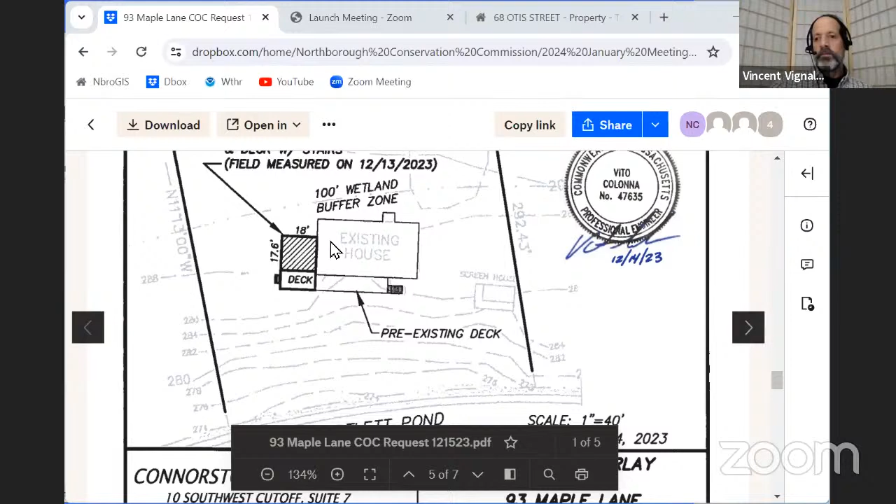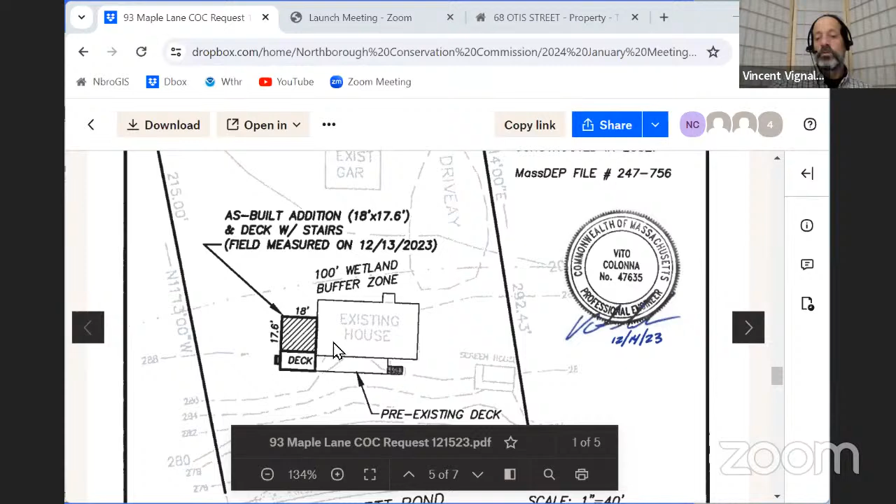They didn't issue an order of conditions for a deck, but the building application had both an addition and the deck. So I believe both were constructed back in 2002 and received a certificate of occupancy back in 2002. So for some reason the commission just didn't include the deck, or just assumed the deck was part of the construction, but it wasn't in the submittal. So that's what they had done.

Let me see if I can do this. Oh, that was pretty seamless.

Looks good. Yep. I think Wayne used to have his house next door to hers. Wayne Baldelli, when he was on the board, yeah, but he lived next door to her, I think. So, I mean, this is 20 years old, Vinny, right? It happened 20 years ago. Yeah, almost older than me. So, that's right.

So do we have any reason why we shouldn't issue the COC? Well, just that they didn't have the deck, but it's been 20 years, like you said. So I think it should be fine. I didn't see any issues. There's no environmental issues.